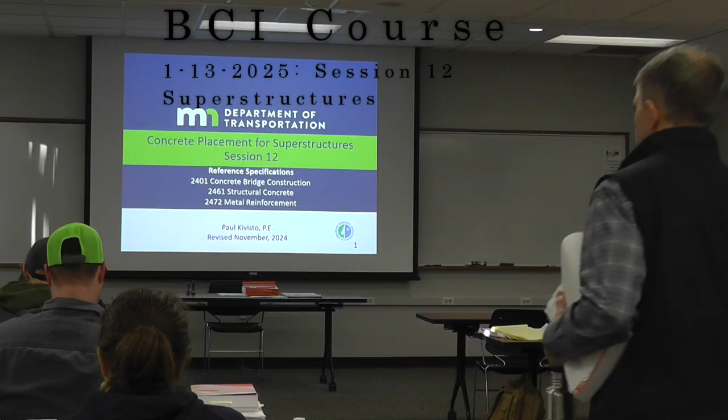Good morning, everybody. Everybody have a good weekend? Good. Chilly one to start this week.

So we don't quite have everybody here yet, but for week 2 we're going to switch to a different part of the bridges. We're going to start with the deck, or superstructure concrete placement - essentially this will concentrate on the deck, which is a big, huge part of what we do. So we'll start the week that way.

We're also going to hear about concrete issues from Jacob Dave from the concrete office.

Before I get into the rest of the week, the last I heard from the Tech Cert office is 10 of you had completed the test. A few more were working on it, so I don't have the latest update, but originally the average was 87%. There were 5 in the 90s, 4 in the 80s, and 1 in the 70s.

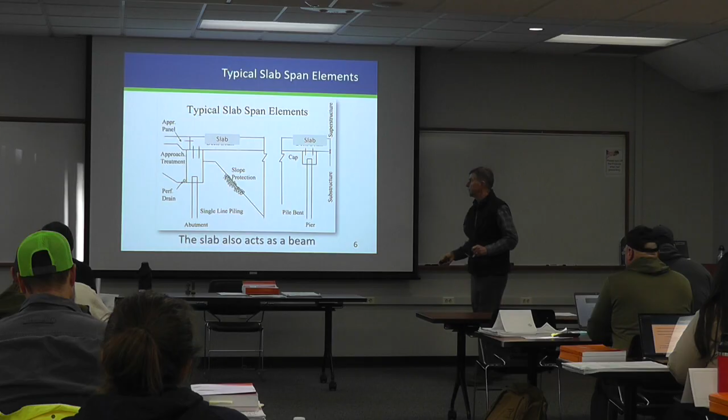So again, showing what the superstructure is. In our spec book, the very first part of 2401 - let's open our spec books, because we may wonder why we're going through something like this. On page 336 it talks about the term bridge slab for the structural portion of the deck, and the bridge slab definition continues on the very top of page 337. At the bottom of page 336, there's bridge deck slab, described as the complete structural slab and wearing course constructed monolithic. Then there's bridge structural slab, described as a structural unit upon which will be constructed a separately cast concrete wearing course.

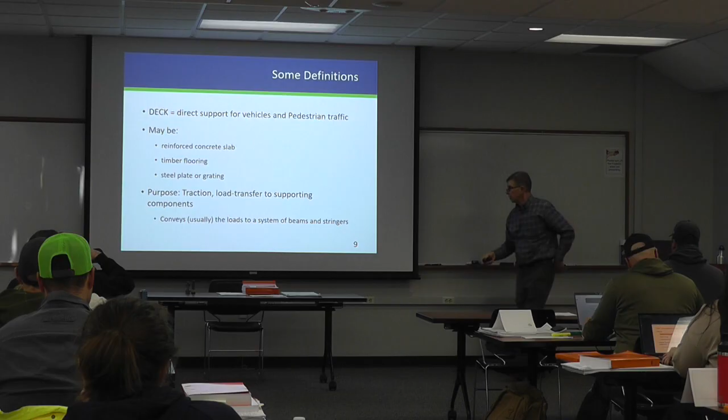The second purpose is to transfer load to the other supporting members. So we have a deck that is spanning 8 feet between girders, and you've got a wheel right in the middle. That load has to go 4 feet to this beam or 4 feet to this beam. So the deck has to be reinforced to be able to transfer that load, and it conveys that load to a system of beams and stringers.

Let's look at the definition. We opened our spec book already to 336, and it's written here. Bridge deck slab, the first one that's underlined: a complete structural slab and wearing course constructed monolithically.

Monolithic means it's all one piece. There's not a separate plane. So that's a bridge deck slab. A bridge structural slab then is a structural unit, and there will be a separately cast concrete wearing course.

So we see the difference. Monolithic, and typically if we just use our typical dimensions, a monolithic deck would be 9 inches thick. The structural unit is typically 7 inches, and then we'd have a 2-inch wearing course. It's not always 7 - depending on the beam spacing, it might be 7.5, might even be 8. But typically 7 inches is what we see.

And then just to further confuse everything, there's a definition for bridge slab which can be either a bridge deck slab or a bridge structural slab. Again, as we get specifically into the curing and into the finishing and the tolerances - is it going to be an 1/8 inch in 10, is it going to be a 1/4 inch in 10 - it's dependent on what our definitions are here.

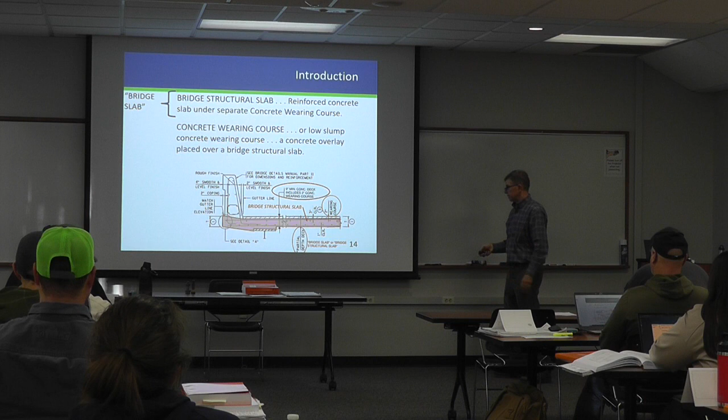The way we make a smooth grade on the bridge, even though the beams are cambered and they're going to deflect, is we use what's called stool heights. The stool heights are meant to be a variable distance depending on where you are on the beam, how much camber there is, and how much deflection is expected at that particular point.

So we'll be talking about that a bit more. It has a couple different terminologies. I use the term beam stool, also called a stool height, sometimes it's called a haunch. Again, it's that variable thickness. It is constructed out of concrete, it's cast the same time as the deck, and we'll see some pictures that will show how to do that.

The purpose is to provide uniform deck thickness conforming to the profile grade of the bridge, and also to make a smooth riding surface. We don't want a bunch of waves and whatnot as you're going across the bridge. We want everything to be smooth.

So we've talked about a couple of these. The camber is something that is either built into the beam, like a steel beam is fabricated in, or a pre-stressed beam, it comes in because of how the pre-tensioning is completed. The deflection is then you have a camber in a beam, and you load it with a concrete deck or live load, and that beam will sag a little bit. So that's called a deflection, the downward movement of the beam due to the loads applied.

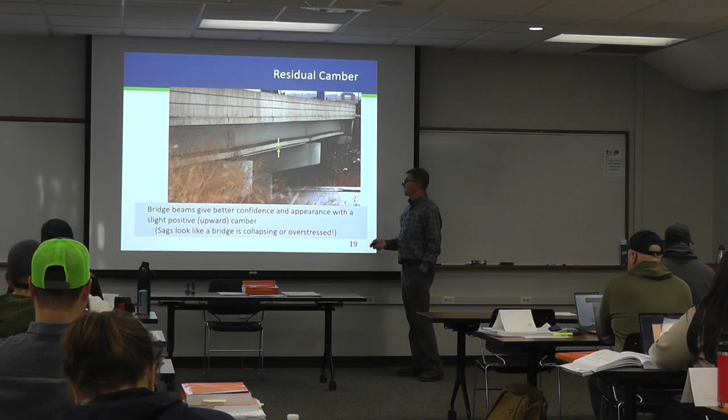Also then, going in and out of the page, we're going to have a profile grade. Is it going up at a 3% grade? Is it doing a curve right over the bridge? What is the roadway doing? All of those things have to work together.

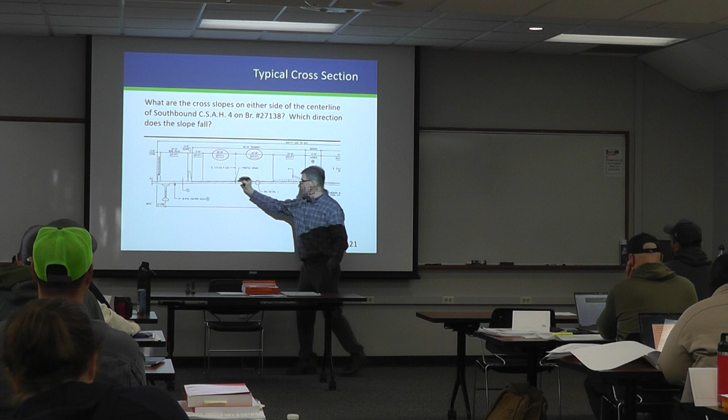Okay, so here's where we are, on 1A. Right here, 0.015, and you get to the center line and it changes to 0.02. Each bridge is going to be a little bit different, but each bridge is going to have similar things like that - there will be cross slopes, most likely more than one. Sometimes on a narrower bridge, maybe from the center line it's just 0.02 everything. But oftentimes the shoulder area gets a little steeper.

Anybody know why that would get just a little bit more grade? Get rid of the water faster - that's correct, and it also gives a little more area so that whatever water is coming in that gutter doesn't get into the roadway. So hydraulics engineers figure out how wide the shoulder has to be so they don't encroach into the roadway. They use whatever event, a 5-year flood or a 2-year rain event, I'm not sure what numbers they use, but try to keep it there.

So that's what happens there, everything is falling down to the left. So that matters when we are designing and calculating our stool heights.

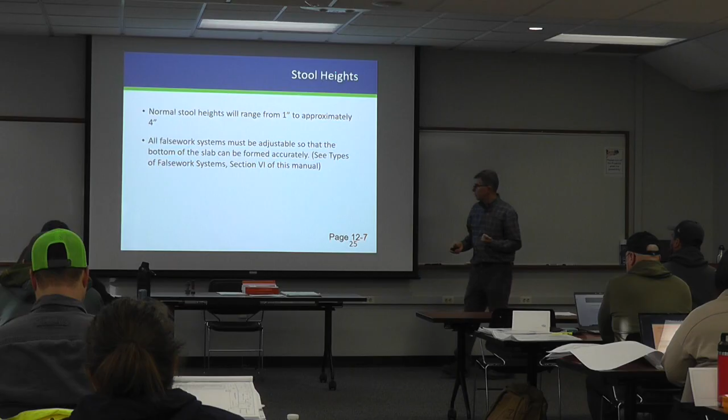Now the normal stool heights range from 1 inch to 4 inches, and all false work systems need to be adjustable. So I had that board hanger up here, we were talking about forming false work. That's how we make that variable system work. So that is something that we've done.

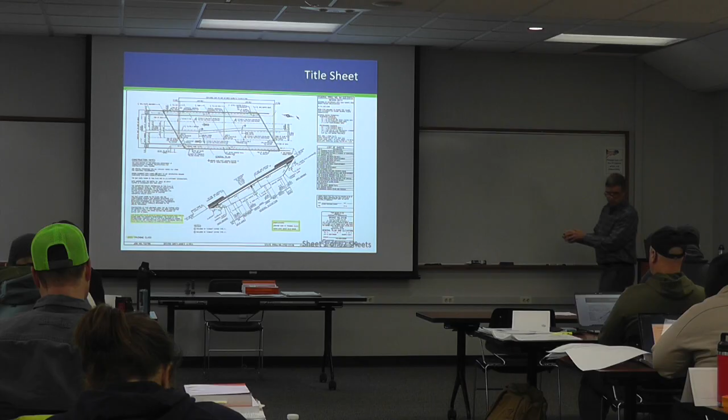So from our plan sheet, there's a lot of information. All of the vertical information, if we look at it, it's hard to tell here, but we've got all of our curve information. So there's a PVI, point of vertical intersection, which gives some stations, gives the grade to the left, grade to the right, and then BVC back over here, different things like that.

The general plan then would have the different lane locations, the location of the median, things like that are all shown here. And then, of course, our framing plan.

So now what we're going to want is to have elevations at each one of our beams from center line of bearing, 5 feet out on every single one. And so the person putting together the construction elevations or the beam elevations needs to put all of this stuff together in the program.

So you might ask, okay, we are going to want to know all these different things. Obviously we need to know at each girder, because we want to set the stool height for that. But we also are going to want to set our barrier, so maybe you can give us some elevations of the barrier. Maybe you can give us the edge of slab, center line and profile. All these things can be requested. What should the elevation be?

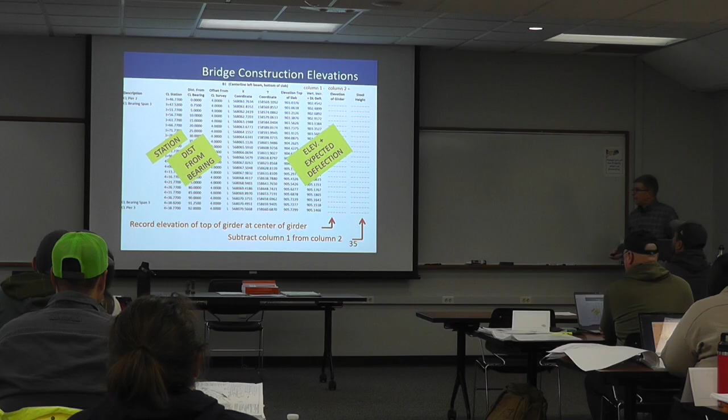Typically, the end of beam will go about 9 inches, but if you're really astute, there's actually an error in this sheet. I noticed, after I asked that question, that they got center line up here, and then center line bearing.

This column says distance from center line of bearing. This shows 0 at center line of pier. The center line of bearing is 0.75, but that should be 0. I've kept this in here just to point out that just because somebody, especially us engineers, gave you that, don't count that it's right.

So if you had that situation, would your center line of pier then be minus 0.75? Yeah, it would. So this would be minus 0.75, this would be 0, and then this station would change so that it's 5 feet from center line of bearing.

Because the reason we do that is that center line of bearing theoretically should be 0 inches of deflection. You have a girder sitting on a bearing that's not going to move. As you put a load out on the beam, no matter what the beam is doing, it's balanced on the bearing, it's not moving. So, very good observation that this number should be 0.

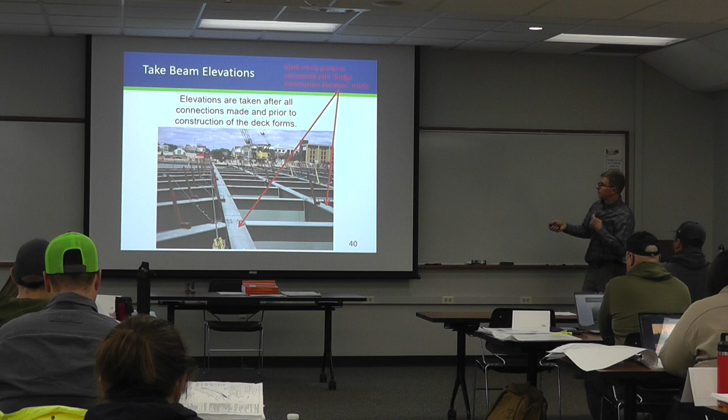Or if the steel's on the ground there for a while, you could do the same. So here's one where, I think this is one of those single point bridges again, but there's an awful lot of points that get marked out there, and we're going to have elevations at many different places. So mark those survey points to correspond with what the construction elevations have.

Splice plates, sometimes they'll fall within that 5 foot span. But it doesn't really matter, because all we're doing is taking an elevation to show where our bottom of deck forming is. So even if it happens to be right on a splice plate, maybe where he's surveying here, maybe this will end up being a 3-inch stool height, and maybe this one, because it's a 1.5 inch plate, maybe this would be a 1.5 inch stool height.

So we're just measuring wherever that 5 foot mark comes. We don't say, oh no, I'm on a splice plate, I better go back 3 feet. Well, we wouldn't have a construction elevation from this point. So you make it wherever the 5 foot mark comes.

So the typical plan note would be something like this: the contractor will take elevation to the top of beams after erection, allow for deflection to show.

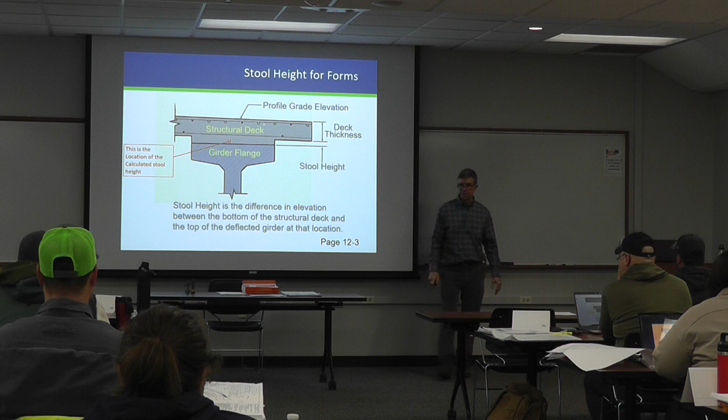Okay, so this is the one where deflection is always 0 at bearing. At center line of bearing, it should be 0. So right here at center line of bearing, but they are claiming it's 0.75 feet from center line of bearing. Okay, so let's just look at these numbers. Should be only the difference of the deck.

So if we take top of slab 903.0638 minus 902.4899, that would be the total deck thickness. And we do that math, it's 0.5739. Well, it's not 7 inches, which is 0.5833. This would be the perfect time to say, engineer, it looks like somebody messed up. We don't have the correct numbers here. So go back and say, let's get this right—we're trying to build a bridge like a Swiss watch, top of deck.

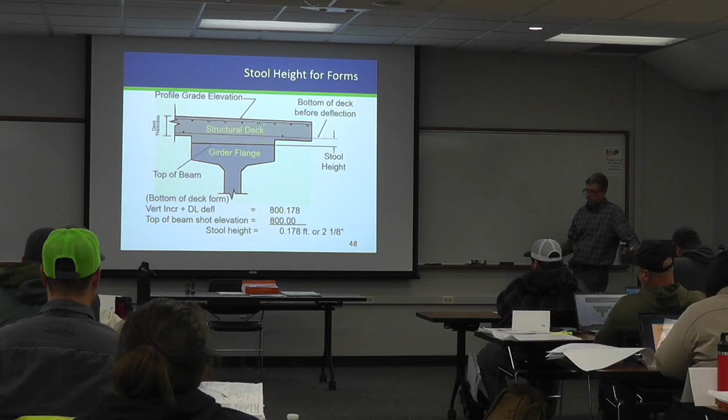So stool heights for the forms—this is again what we look at. It's the bottom deck form. We take the vertical increment plus dead load deflection minus the top of the beam elevation, and it gives a stool height. So if we just do the math here, 800.178 minus 800 is 0.178, so that's about 2 1/8 inches. 0.17 is right around the 2-inch mark.

So the special provisions do talk about taking elevations after erection and allowing for the slab. It also says to take elevations no more than 75 calendar days prior to slab placement.

The reason for that is these concrete beams, because of the pre-stressing in there, will continue to camber over time. So if you took elevations in the fall and waited until spring to cast, those beams will continue to grow in camber. Then spring comes, and your elevations aren't going to be right anymore because that camber may have increased by a quarter inch or three-eighths inch or some number.

So be aware of that in the special provisions, and be aware of all of the notes that we have.

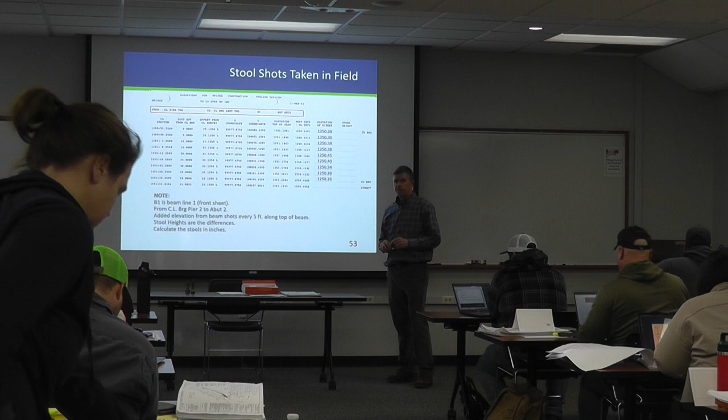And cookies in the back. Come on. We could use the refrigerator. Yeah. Figured something to do. Good question. But it's nice, it's just like metric. Engineer scale and metric. I want to chop that out. And then I come back on here.

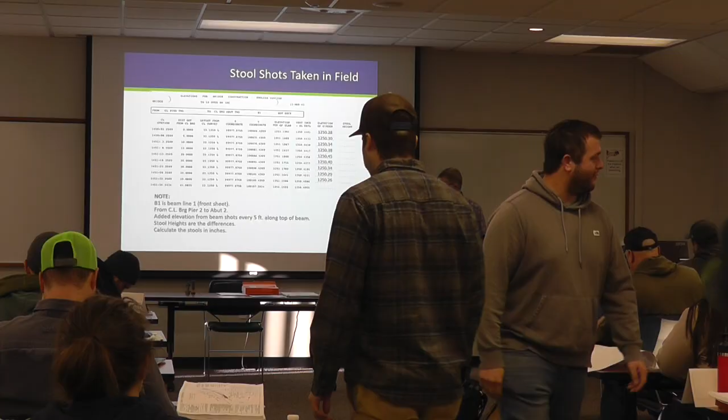Any questions about what we went over in the first 45 minutes? I don't know where they are.

Okay, so we're going to actually do a couple of little number crunchings here. So if we come out to the field and take our elevations at the girders, and we have these kinds of numbers, what do we have? So we'll have a little exercise here.

So the thing we always want to make sure is, are we in the right place? B1 is beam line 1, and so we look at that, and beam 1 is right up here. So anytime we're doing any of this, are we looking at the right thing? Are we in the right span? Is it centerline bearing pier 2 to abutment 2? So we just want to make sure everything is right.

So here's some numbers to crunch. From what we've said so far, we have a station, we have a vertical increment with dead load, and we have an elevation. What is our calculated stool height in feet for this number right here?

So the vertical increment plus dead load deflection is where the bottom of the slab wants to be. The elevation on top of girder is where the girder actually is. So we're figuring out the stool height.

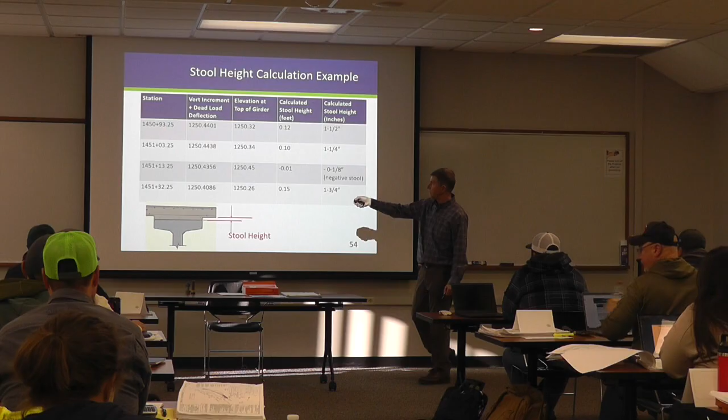Okay, so this would be where we're setting at these particular stations for this particular, whatever the beam is, we don't even have it on here. For those stations for that beam, I guess it's from the previous one, that's what we would have.

So otherwise you can commit these to memory and you can just think about how about 0.08 is about 1 inch, and that would be how we would do it. So again, we see for 1 inch, it's 0.08, 0.17 for 2 inches, and 0.25 for 3, and you can kind of commit these to memory, and again, that's not important, we just need to know how to do it.

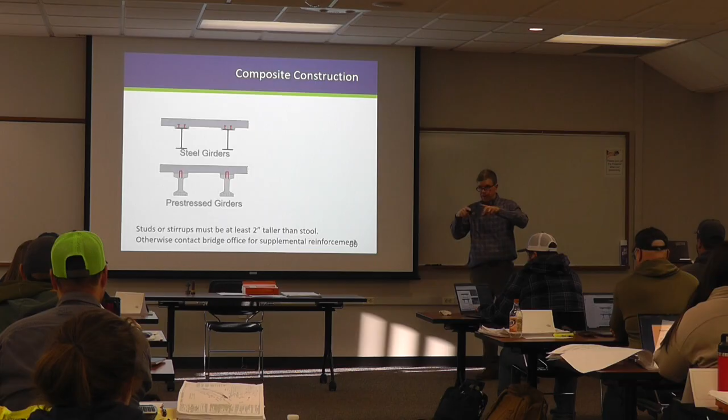The spec book requires that the composite action, that these hooks or shear studs are at least 2 inches taller than the stool. And typically we have a 1 inch bottom clearance, and then you'll have a bar. So you got to have from your bottom of the deck to bar is 1 inch. Plus you have 1 bar transverse, 1 bar running longitudinally. And to get 2 inches, you're actually up to at least the top of that bottom set of bars.

So here's what the composite action with the shear studs on steel looks like. Nick had shown a little bit about how we fabricate those and clean them off. There's an automated procedure to weld those on. Here's a picture of the concrete, with stirrups coming out looking like that.

Because of safety, we no longer put shear studs in place before the decking. When I started a long time ago, I remember walking beams with the shear studs already on there, and you had to walk sideways and be careful your pant legs didn't get caught up in them. This is a good move, it's a lot safer. You still have to be careful if there's no decking, but the shear studs now get put on after the fact. That's something that's in the specification.

It was a tripping hazard. You had to be careful walking, and so forth.

Once our forming is in place, if the stud height is less than the stool height plus 2 inches, longer studs need to be ordered. Nick had shown a picture of the little stubby studs they make—if the stud was too short, you could add a little 3-inch stud welded on top, which is a way to increase it instead of ordering full long studs.

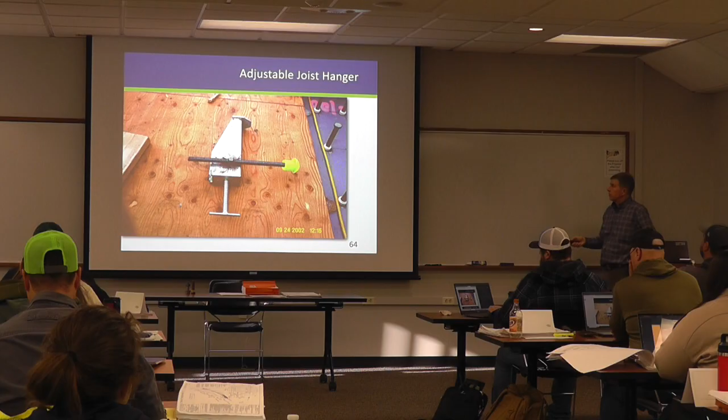We had looked at this situation before, when these kicked out. So what did we learn? We learned that you need something to keep those board hangers from kicking out, and that you need to put some kind of wedge or shim between the stringer and the edge of the girder to make sure there's no wiggle. That kicker is important to keep things stable—otherwise, this can happen.

These beams—our M series and MN series—are starting to get thinner flanges. The older shapes had like a 6-inch thick flange; now these are 3 5/16. It's a lot thinner a flange there.

There's a requirement now for future redecking that we put a bond breaker for a few inches on each edge of the beam for the full length. The reason we started specifying this is I was on a few redeck projects with pre-stressed beams, where there was enough composite action that all the deck concrete was composite constructed, making it really hard to remove the deck—so a lot of these beam edges would get destroyed.

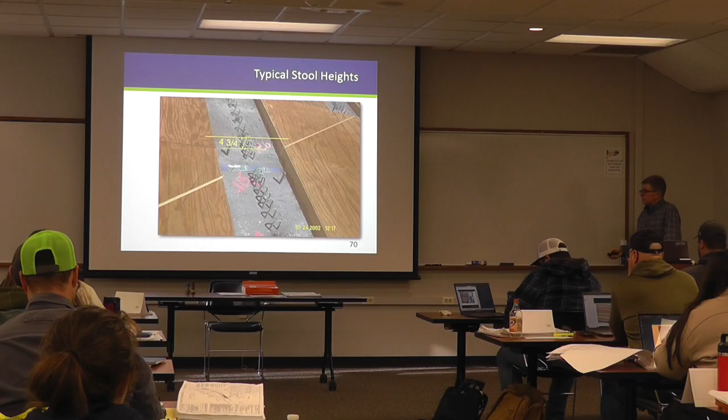What are the problems we could have? There's a couple issues. One, the structural deck thickness is less than required. Right here at the end of the girder, instead of a 7-inch or 9-inch, we'd only have say 5 or maybe 7, depending on the total deck thickness. So we'd see that that is a problem.

Now instead of being down here, the rebar would come up and over. Secondly, there's constructability problems with form removal. So we don't like negative stool heights.

So that's things we want to avoid. Okay, so what can we do? Linda said, well, somebody must have screwed up. Well, it's possible somebody screwed up, and part of this is, let's check what happened.

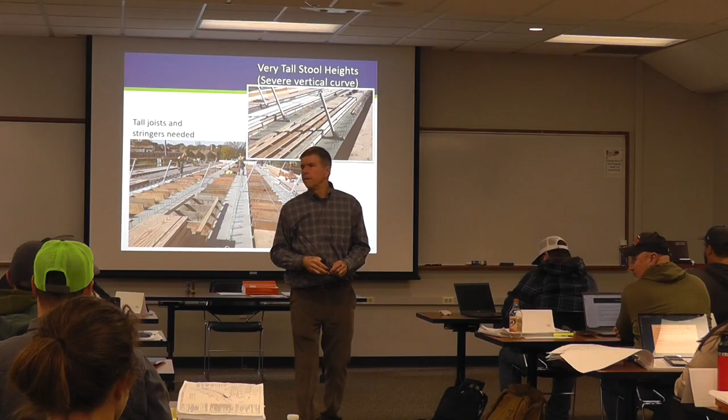That's something you'd probably want to make note of in the as-built data, just say that, yeah, we had to raise the grade, 3 inches or 1 inch, and oftentimes they would do it in the engineering scale, raising it a tenth. It's easier to work with, but otherwise no need for plan changes and things like that.

But very, very common. So if that's ever a situation on your bridges, don't think, oh no, this is the first time this ever happened in the history of MnDOT. It really happens quite a bit.

So an opposite thing is very tall stools. I think Nick mentioned this a little bit and showed the U-shaped hat bars. I'm going to show it again. What if we have, say, 8-inch stools, and these are only extending out 6 inches? Well, they're not even getting to the bottom of the deck, let alone to the bottom of the rebar.

So we would use what we call hat bars, kind of a U-shaped bar, bent in this shape, and they'd come out. Put a couple of longitudinal bars in there, and that would help produce composite action. It would help tie all of this reinforcement and all of the concrete stools together.

So that's what we have for that.

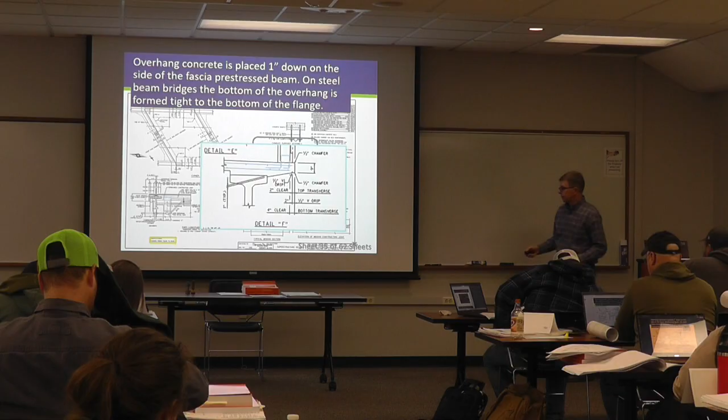Let's make it a little bit bigger - that little 1 inch typical. So we can see there's a lot of lines here, but essentially these are just dimension lines. This top line is pointing to the top of the girder, the bottom line is pointing to where that goes down. So I see a lot of these little forming details. Decks formed 1 inch down, and a lot of times that just gives us a little cleaner lines.

Here's preparing to install the overhang brackets. I think I mentioned in the forms and false work, this is one of the things where many times I've gone out to bridges and looked at how is that ever going to come back down, but they do. So the information from the form manufacturers is pretty good.

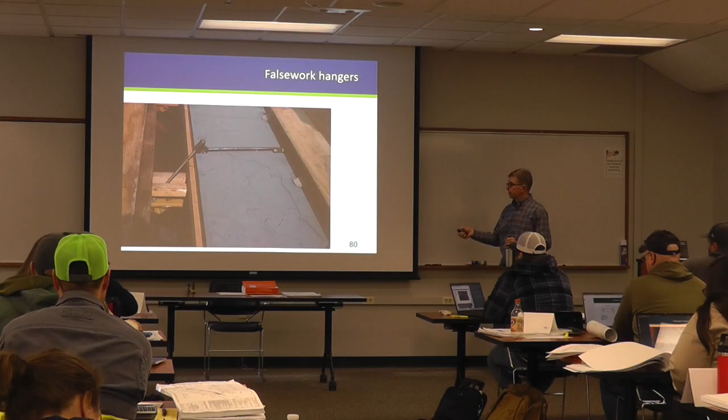False work hangers - this is an older system. We don't see this much anymore, but always be looking at what the contractor is supplying, whether there are safe working loads, and make sure our calculations match. What if the contractor wants to use the older style that you weld right here? Is it allowable? Galvanized? Welding to the top flange of steel is not something we want to do.

So we stay away from welding. What can happen is it can make a fracture, especially a transverse weld like that, and really any weld. It can start to initiate a crack, and pretty soon you could have a fracture of that girder. So don't allow them to weld on the top.

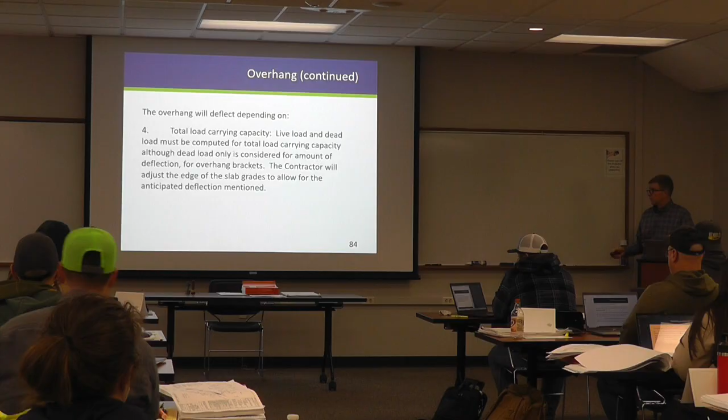We always want to know what's the total load carrying capacity. Live load and dead load must be computed. The live load oftentimes is the weight of the workers, of the screed rails, of the screed itself, whatever's going on like that. And this is essentially just saying if the overhang deflects a 1/4 inch when dead load is applied, it's actually raised a 1/4 inch. The manufacturer has to supply that information.

We want to have a secure and stable connection. If you have a stringer with a little gap and you don't fill that, as load gets applied, it can tend to shift a little bit. So you want to always make sure we have a little wedge in there to stabilize everything.

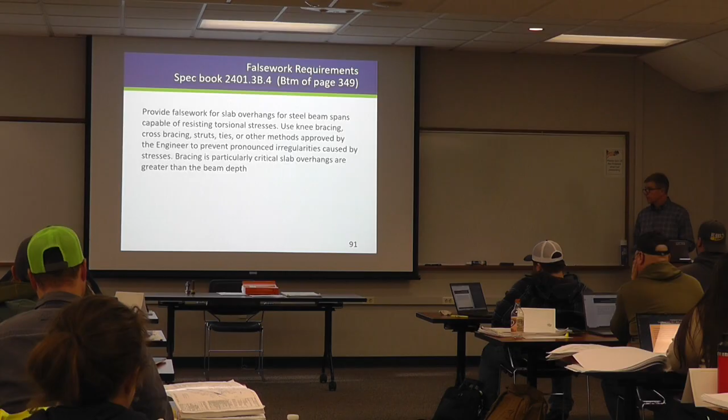We talked about falsework requirements quite a bit last week, and the requirement again is provide falsework for the overhangs, use knee bracing, cross bracing, struts, ties, whatever you need to prevent any irregularities, and brace and so forth. It's critical that we make sure everything is done.

Again, kind of a review, but why do we check falsework? Why are we learning about falsework? It's so that you will be able to know and verify - is the spacing of the members what the falsework plan shows? The design plans are not going to have that. What do the falsework plans show? What's the condition of those members? Is the material what we need? So we did study that.

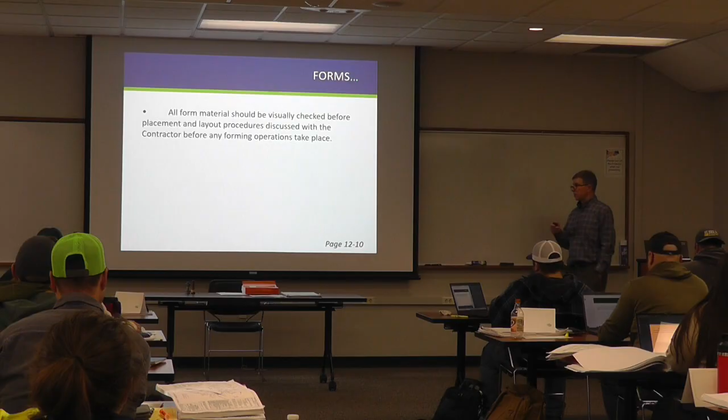Many times it can be adjustable formwork, like we studied in the forms and falsework section, so we don't need to go into much detail there. In the forms, everything has to be visually checked. Remember that the contractor's falsework engineer has to come out if it's falsework and review that this is what is required. And if the contractor makes changes, they're certainly fine to make changes, but it needs to be approved. Make sure if there's anything that's bent, cracked, holes, knots, whatever, that somebody is aware of that.

Okay, now let's get into a little bit of some of the specs. So 2401 3B7 - let's open our spec book to that. It's on page 351 of the spec. We're going to talk about some of the particulars of deck construction.

B7, toward the bottom of the page, says before placing reinforcement, treat the contact faces of forms with form coating material according to 3902. Why would we do that before placing rebar? The rebar would cover part of the form, kind of, but not exactly. What else? You don't want release oil on your rebar, because you want the concrete to grab the rebar. If you put oil on the rebar, the concrete won't be able to grab onto it to make it composite. So that's a requirement that all forms shall have form oil applied before rebar placement - that's right in the spec book.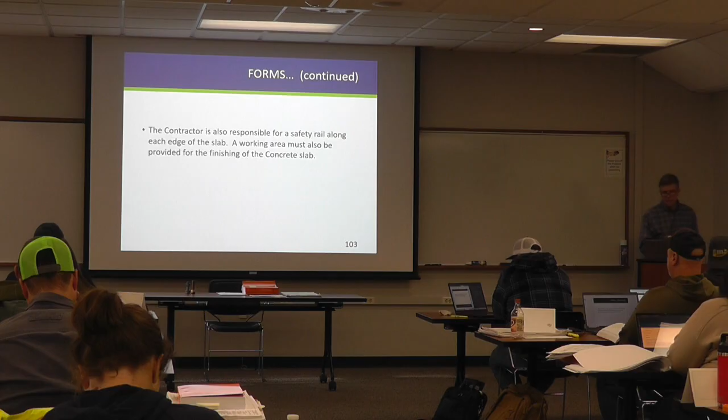Reinforcement bars—we discussed that in section 7, Mark did. And it's important that we have the proper clearances. Obviously the proper size, the proper spacing, and the proper clearances. Just make sure everything is correct.

What's the clearance on our bridge from the bottom of the deck to the bottom mat of rebar on 27-138? Figure out what plan sheet we're going to find it on.

Just in general, where are we going to find the deck sheets and the deck rebar? Superstructure details, yeah. So starting, is that going to be more toward what part of the plan? Starts on 35, very good. So somewhere there we're going to see some numbers. So who can tell me where we can find the clearance, bottom of deck to bottom mat of rebar?

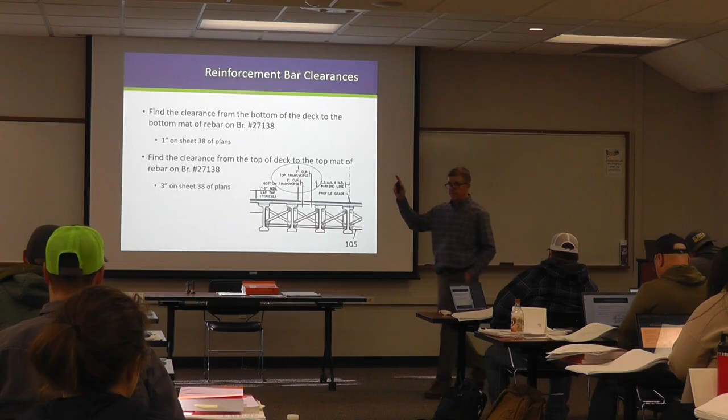This is very common. 1 inch to the bottom is very common, 3 inches at the top is very common. In fact, I would say if it's something different, it would be a 1% of bridge type thing or something. I mean, it's almost 100%.

Okay, another one. Find the clearance from the edge of deck to the top transverse deck rebar on our bridge. This is going to be on a different page, I'll tell you that. Same general location.

What was the question again? Edge of deck to the top transverse deck rebar. So for terminology, transverse deck rebar, which way is it going in the deck? Kind of with the stationing, or perpendicular? Perpendicular? Yeah, so it's the bars that are perpendicular.

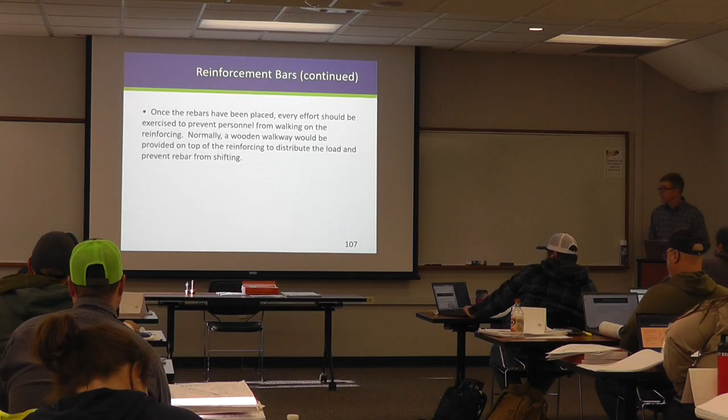Once the rebar is placed, we want to exercise caution that we don't keep the bars from moving. Normally a wooden walkway would be provided. And here's just a reminder, no foot traffic should be placed once rebars are placed. Why? Because it would disrupt the bond of that rebar. And where bars project well above the placed concrete, we also want to brace them to make sure they stay in place during the concrete placement and the finishing.

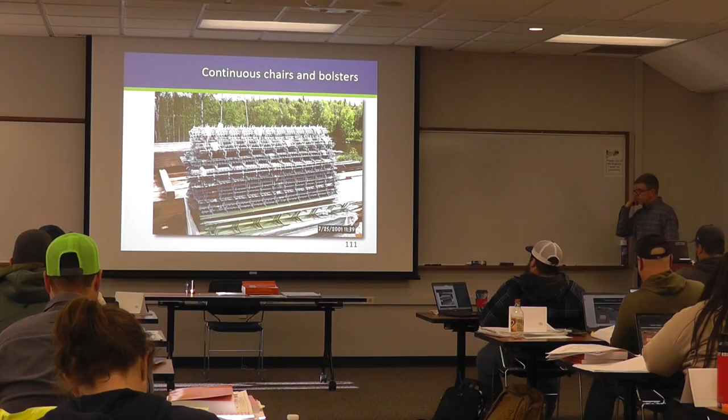So this is what our continuous chairs and bolsters look like. Something like this is for the higher chairs. We've got a couple examples in the back there of some high chairs.

But I want us to do a little exercise here for what is going to be the height of our high chairs for our bridge. So we have two spans, span 1 and span 2. We're going to look at sheets 35, 36, and 37.

I guess I'll ask it this way: what are the longitudinal size bars? They're going to be the same in both spans. And what are the transverse bar sizes in span 1 versus span 2? So first off, who can tell me for the longitudinal bars, what size are they going to be?

Let's look first at the top reinforcement on sheet 36 - longitudinal bars running along the length of the bridge. So let's look longitudinal - the ones that are running from abutment to abutment, the bars running this way.

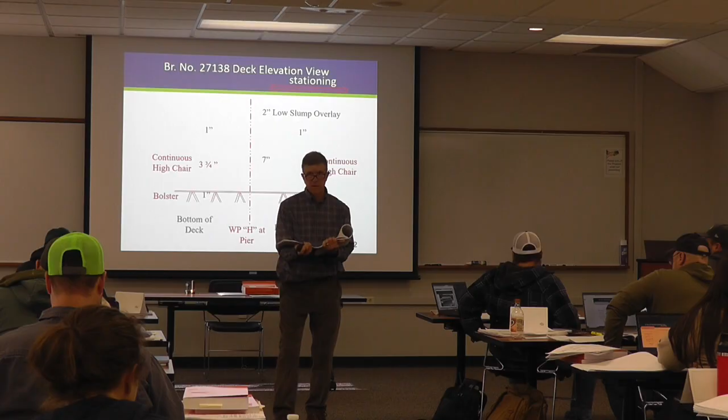Okay, is everybody following? So we're looking at the bars running the length of the page. These bars are kind of in the middle - I'm on page 36, it's an S401E, and there's a bunch of arrows running to them. Then over here it's an S402 on the end. So what size is that bar? Number 4, meaning how big a diameter? Half inch, 4/8 or a half inch.

Did everybody see that? Okay, so now how about the transverse? So the transverse on the same top reinforcement, page 36 - what's the size of the transverse bars? Okay, heard 5 for span 1, 4 for span 2. Everybody seeing that? Okay, so here is the designation, and that's showing all of these bars going this way.

Oh okay, see that? So these dimension lines here are saying that we start dimensioning a bar up here. And this is a 4, and over here, what number is that? That's a 5.

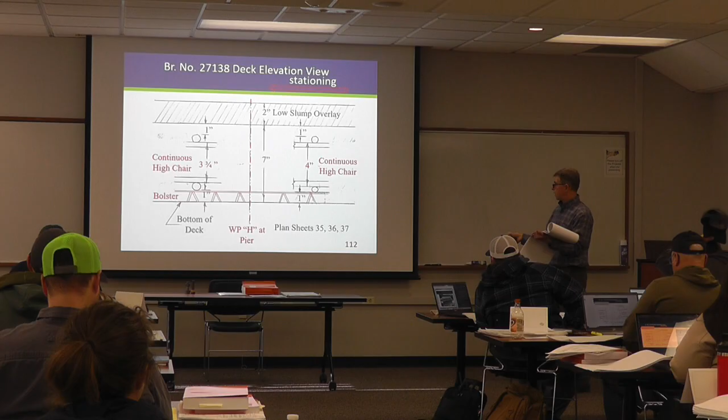Okay, are we able to see what we got there? So the transverse are the ones going perpendicular. Again, span 1 has number 5, a 5/8 bar, and span 2 has number 4s, or a 1/2 inch bar. Okay, so everybody get that? That's a key part of reading what we have on our plans. So what are we trying to do? That means in our plan we have different size bars - it's 5/8 inch in span 1, and this bar is a 1/2 inch in span 2, and then the longitudinal bars are going to be 1/2 inch in each case.

So I think we have some math that happens here - what size are transverse in span 1 and what are they in span 2? And so we just put in some numbers here.

So the continuous chairs that they bring out actually have to be different in span 1 to span 2, because the chair will sit on top of, depending how they do it, either a bar or the bottom bolster. Typically it's going to be on top of this bar. This little arrow to this little arrow is showing that's 3 3/4 inches.

Because we will go on top of the transverse bar and then space the longitudinals in there, and then we'll set the top transverse bar on top of the high chair. So what this is telling us is that if they come out there with just a 4-inch high chair in both, they're not going to have the correct overall 3-inch clearance to the top of the deck. If they went with a 4-inch chair, that would push this up. So just be aware of that, do the math, make sure the contractor has the correct elevation and size of things. So that's a little complicated.

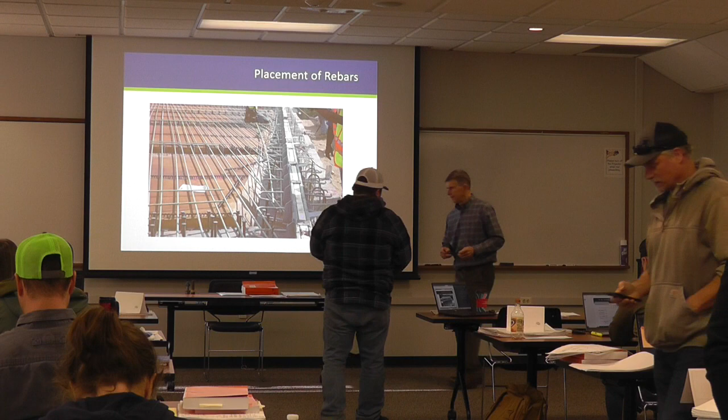Okay, let's get rolling again. So any questions on what we were doing for those few exercises?

Best thing you can do is go through and highlight the plan, find all the bars. Just find out what the bars are, what the laps are, and all that kind of stuff will help us when we're out in the field trying to inspect. Yeah, there's just some key dimensions always and key bars.

Okay, who sees anything wrong with this picture? Can we tell what's going on? There's a bottom slab bolster right here, a chair right here, a bolster over here, a beam over here. I think your high chairs are going the wrong way. High chairs are going the correct way, but yeah, they're in between those slab bolsters. These should be stacked, so the high chairs should be right over where the lower slab bolsters are. So you see that's in the wrong direction.

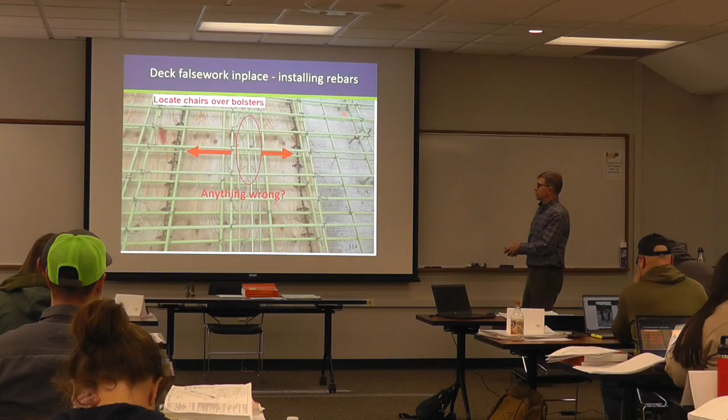So here, this is an old one — almost took it out, but among the things they're talking about is some of this plywood isn't matching, check what the spacing is on some of those bars, walkways, studs not placed in positions correctly. But a lot of times we want to make sure our bolsters and our chairs are in the correct location.

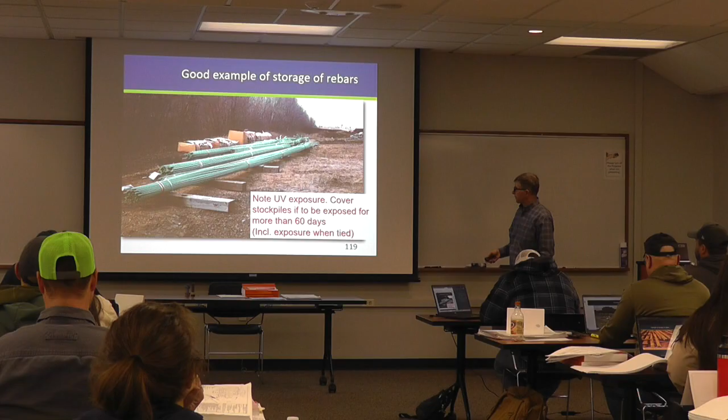Also on page 550 - one of the first jobs when I was a Metro Region engineer, I went out to a site and an iron worker said, 'Hey, we don't have to tie 100% of these top bars, right?' I said, wait a minute, I think I remember the spec. And indeed there is. On page 550, bottom paragraph, it says to tie the top mat of epoxy coated rebar at every transverse bar intersection along each continuous row of longitudinal bars.

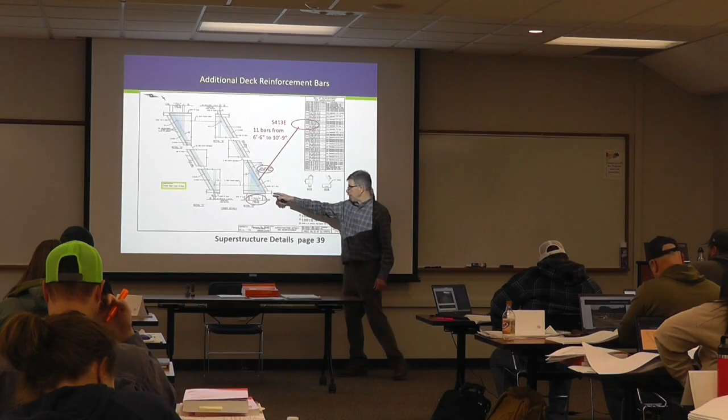What is the length difference of those series bars - what's the shortest and what's the longest? S413 - they're 6'6" for the shortest, and the longest is 10'9". You see that in the chart, in the bill of reinforcement. That's 413, 2 series of 11, meaning there's one on one corner and one on another corner. The shortest bars are 6'6", the longest is 10'9", and you put them in there with the 5.5 inch spacing, then fan them kind of as shown.

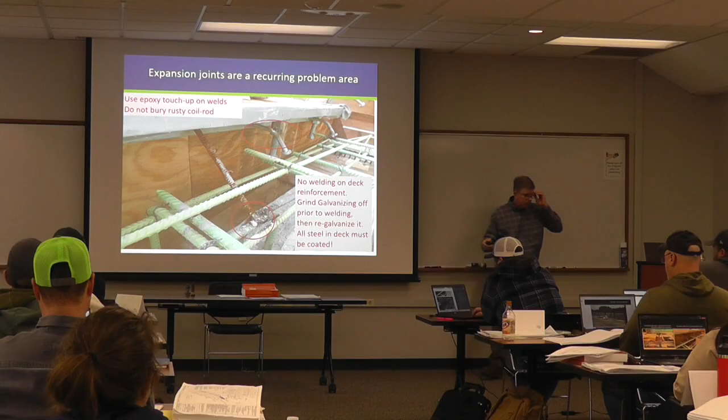Here's some pictures of expansion joints. Use epoxy touch-up on the welds, don't bury rusted coil rods like shown here. We don't weld deck reinforcement, grind off for galvanizing, and then re-galvanize it. All steel on the deck must be coated. Sometimes there's no workaround, so an occasional tack weld has been allowed, but I'd rather have a solid expansion joint than say the spec prohibits welding rebar and end up with a sloppy job on the joint. Be aware, sometimes you do need to do something, but it really has to be minimized.

Also, if we're going to have a secondary pour, we want to protect the epoxy, the concrete, and the rebar from concrete splash. This is more so on rail bars, not necessarily here. This is just an end diaphragm, and that would typically all get poured with the deck, so it's not quite a big deal. But a rail rebar is more of an issue.

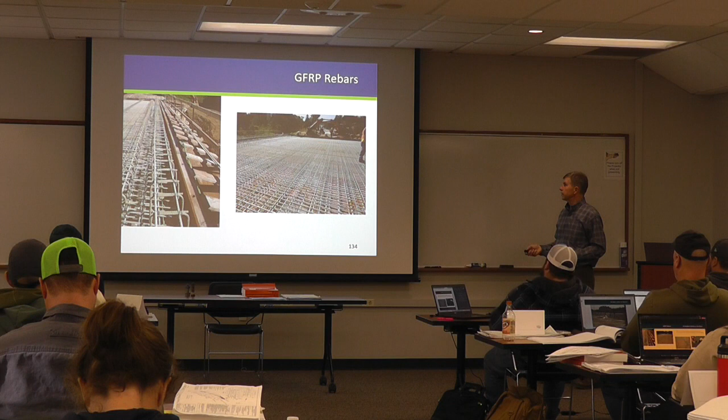Okay, so we'll transition now to how do we finish these decks? The contractor has to understand each span has to be loaded uniformly, especially if you're on a skew. We'll talk a little bit about some of that kind of stuff.

We want to have elevations correct for expansion joints, for bulkheads, for copings. As inspector, the numbers will tell us one thing, but our naked eye will tell us another, that we can sight down the rail, and if we see a little dip, well, something's wrong, that shouldn't be like that. So oftentimes that's the final check, is just look, does it make sense? Does our naked eye check seem right?

Okay, what do our specs say? Page 367 of the spec book talks about our power supported screeds and things. So let's turn to 367 and let's see what it says. Okay, so we're C-4, which starts actually on page 366.

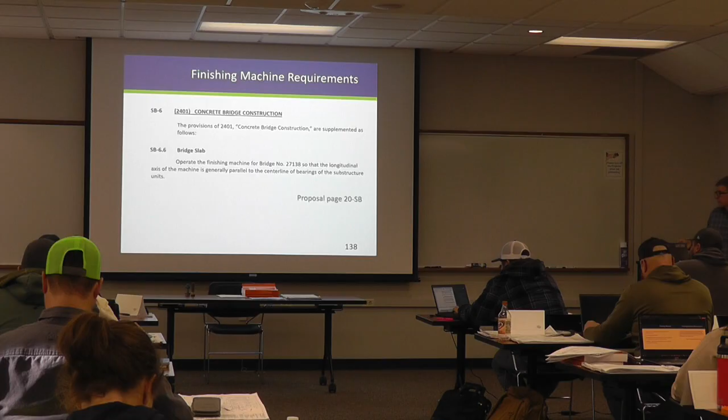Okay, page 367, we also have some requirements in our special provisions. And again, we have the wrong special provisions that we handed out in the class, the right ones are now on the website. But for 2401, it says this: operate the finishing machine for our bridge so that the longitudinal axis is generally parallel to center line of bearings.

We also have requirements on page 364 that talk about, if we have at least 2 spans, the concrete has to remain plastic for at least a half span length back, and provide admixtures as needed to retard the concrete setting time. So what does that mean in the real world, in the practical world? Let's look at a little diagram here.

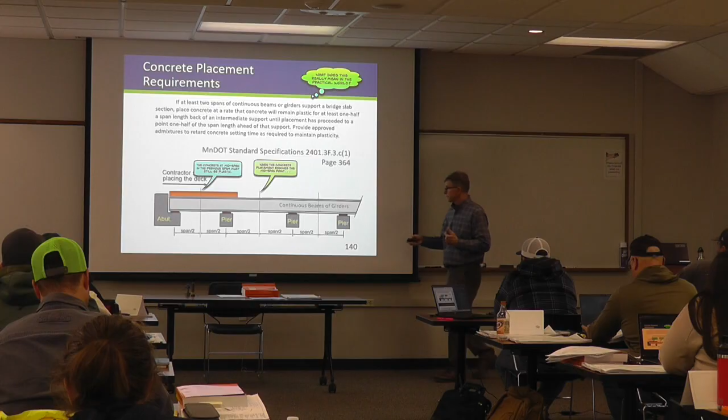There's also requirements, page 363, of having a trial run with the strike-off machine. This is on F3C-1, very bottom of 363. It talks about checking the depth and a shim to the rebar. Essentially what we're doing is verifying that the slab thickness is correct and that we have clearance to our rebar.

You want to check that your roadway crowns are in the right location, and any strike-off is done correctly. If you're off the bridge, you don't have any deflection, you're right on grade, so whatever grade rails or screed rails you have, you don't have to account for deflection. But when you're on the bridge, you need to account for deflection.

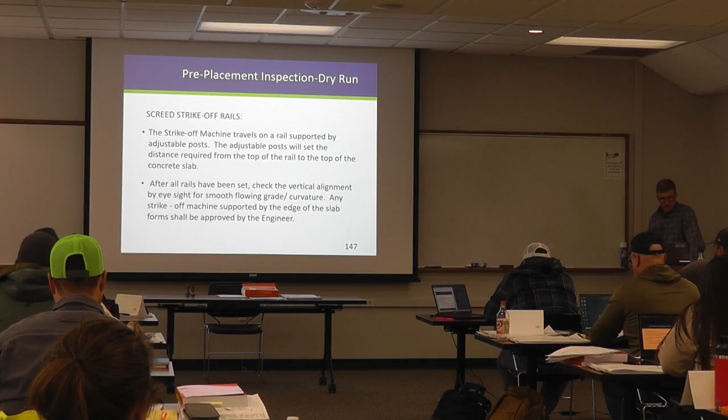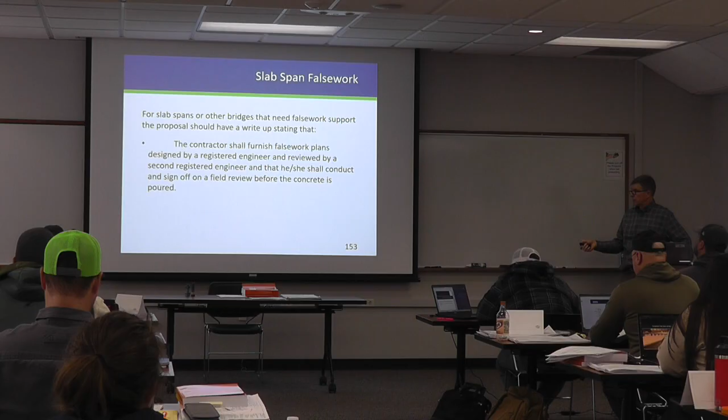Slab span, there would be some additional language that they need to furnish false work plans. So again, in the forms and false work section, we looked at that, designed by a registered engineer, reviewed by a second, and then he or she shall conduct and sign off a field review before the concrete is placed. So that's all part of forms and false work and the things that we do.

Sometimes we will have a requirement to cast in a certain location first. And this is if the spans get long enough that they can't achieve and keep concrete plastic at half a span back, we would require that they do a deck placement. So all this is showing is the first one is from the abutment out to this location. So that's pour number one. You're trying to get some of the positive moment deflections out.

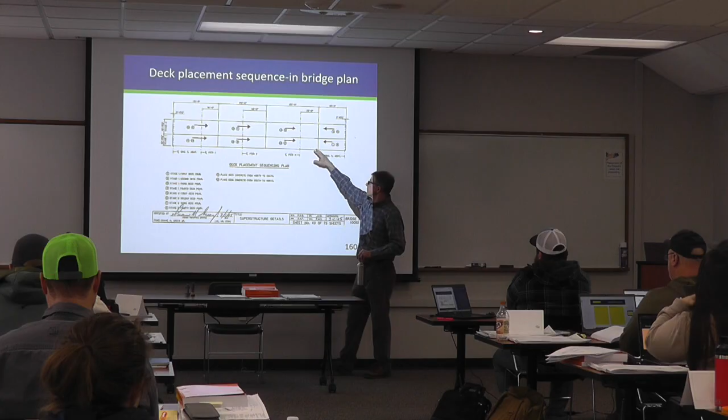And then you're going to come, pour 2 is coming this direction, and you're going to come back. That is coming over a negative moment region. So positive moment is typically mid-span, negative moment is over the piers. We're just trying to minimize the amount of tensile forces that might happen during a deck pour. But if you have longer span, if you're on a steel bridge with longer span, this might be in the plans. So just be aware of what it means.

So the sequence oftentimes would be for spans that are greater than 200 feet: typically we place a positive moment first. Sometimes it combines a positive with a negative moment. If we're doing simple spans, it'd be support to support. But this is kind of the rule of thumb. And we would maintain a pour rate of 0.6 spans per hour. So essentially in a little bit less than 2 hours, you got to be able to do each span. So you got a 200-foot span, that's a long ways to go.

And then you'd wait 72 hours. This last part, do the center part after 72 hours. So you can wait for concrete to cure before you do it again.

So the special provisions might have things like maintain 80 cubic yards per hour. That's a little bit more, you can track that better than the 0.6 spans per hour, but whatever. Just read the special provisions, know what it is. And especially on slab spans, where they're thicker, even though the spans are less in length, it's a lot of concrete that you need to keep going. So they want to maintain 80 yards.

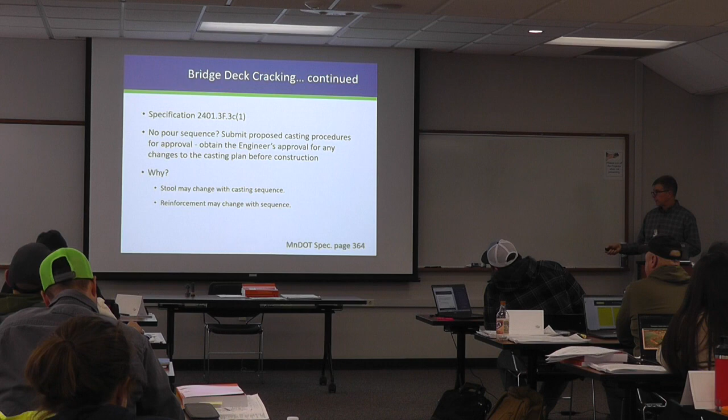For deck cracking, to minimize it, we really want to see what the contractor has. So sometimes we would say submit your casting procedure for approval. And if they do something different than what the plans are intending, the stool heights might change, especially, so we're taking a lot of deflection out of one, but it's restricting the deflection in another point. So it's even possible reinforcement may change. I guess I haven't seen that in my days, but it's possible if you really change something up that you could have some changes there.

So here's some more spec stuff that we have. There's a whole bunch of specs there, page 3, starting in 363 all the way through 376 of what the forming is. But we'll bring to your attention this one.

Provide a placement and curing plan at least 14 days before the slab placement to the engineer for approval. And these are all the things that they need to consider in that placement plan.

Now, what is your delivery date, rates? When are we going to start and finish? Are we starting at night, finishing in the day? Are we starting at 6 p.m. and going through the night? And whatever's going to go on.

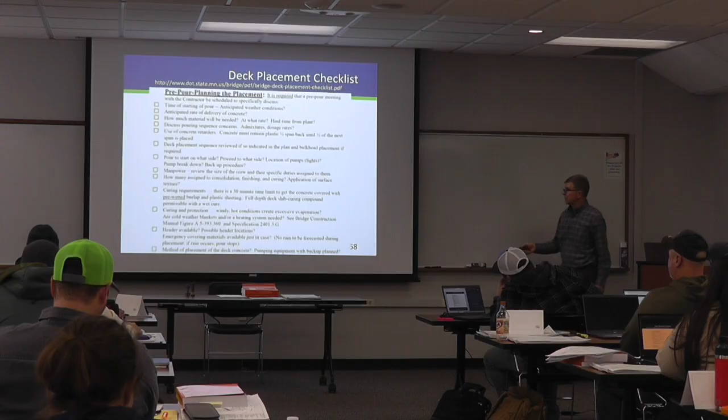There is a deck placement checklist on the Bridge Office website. This is a handy tool that, as you're getting ready to cast a deck, you can run through. The next one blows it up a little bit more - when are we starting, delivery rates, manpower, so on and so forth. This doesn't have to be filled out, but it's a good tool to help remind you of the things you should do.

So, different things here - I think it's 4 pages or something. So a lot of things that can help remind of what is needed.

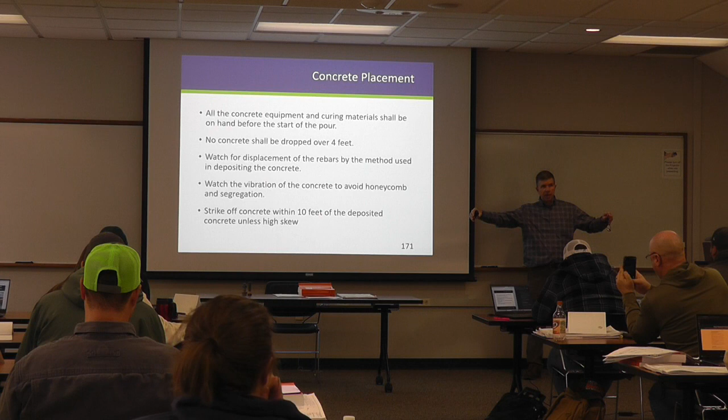There's also a requirement that you need to strike off the concrete within 10 feet of deposited concrete, unless it's a high skew. All that means is don't go out to half the span placing concrete and then finally get around to striking it off, because by then it'll start to harden up and you could have drying shrinkage issues. So pretty self-explanatory on that one.

Concrete placement over traffic - this is something that's changed in the past couple of years. Be aware of your special provision. In the past, we used to routinely place deck concrete over traffic, but that has changed. So review your specs. Now, a lot of times you require them to shut the traffic down, or go up and over a ramp if that's available, a little detour, whatever. So review your special provisions. If there's an absolute need, I think there's things that the resident engineer or the project engineer could get into the spec, but anyway, just be aware of what might happen.

So there's 2 different types of deck pours. We've so far shown some pictures of the Bidwell finishing machine. A structural deck pour with a separate wearing course means that there's 2 pours. We can use a Bidwell finishing machine, or we can use what's called a Morrison screed, or an air screed. And we'll show some pictures on that.

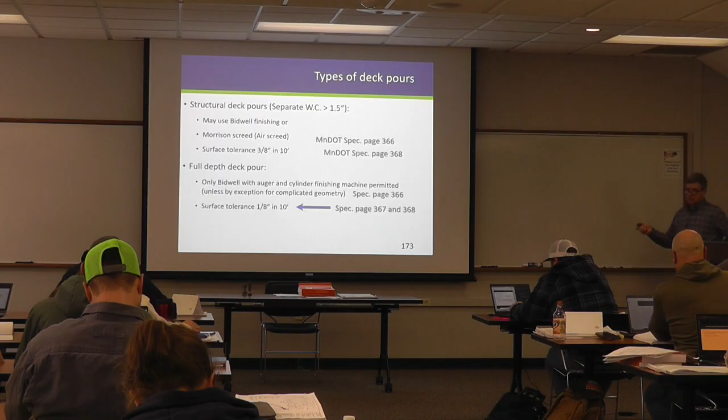And then the surface tolerance shows up in a couple of different places, but back to that page 368 where we looked before, item 4 shows it does not vary by greater than 1/8 inch, checked with a 10-foot straight edge, for bridge deck slabs. So we see the difference there - the surface tolerance, if you are running traffic on that surface, a full depth deck pour, we need to be a little tighter tolerance.

So if we were going to do this deck without a separate wearing course, what would be some of the issues? This is our bridge deck without a separate wearing course - what are a couple of the challenges that we might face?

If we needed to do a full depth deck with a median width, what's the median doing? It's varying all over, one side or the other, so to set up a finishing machine you'd have to contend with that. You'd have bars projecting up out of the deck, so you'd have to somehow hop up and over, or maybe set up one machine on this side and another on this side. So that's not too conducive to doing a full depth deck pour. Now if that median was straight, maybe that'd be a little easier - then maybe we could do half of it with one finishing machine, another one with the other. So that's something we would see.

Also, we have the trail areas - how are those going to be finished? We have bars extending out, so there are some things we need to think about as to the type of deck pour and the type of geometry we have.

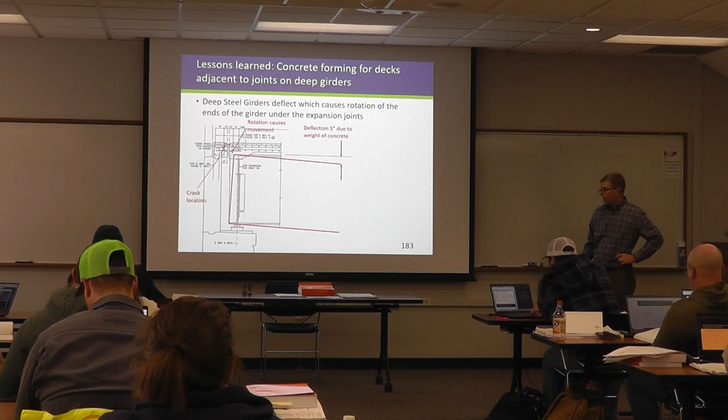So this is what happens. Deflection was 5 inches due to the weight of concrete. They started at the abutment and went to the right. By the time you get out to mid-span, most of that deflection has already come out, meaning that girder end is moving. So what's happening here affects how that end is formed. I'll have a couple of diagrams that will show that, but what they noticed out there is cracking right along in the end block.

Using this diagram in this picture, depending how you form this, the end of the girder is moving to the right due to deflection happening out in the mid-span.

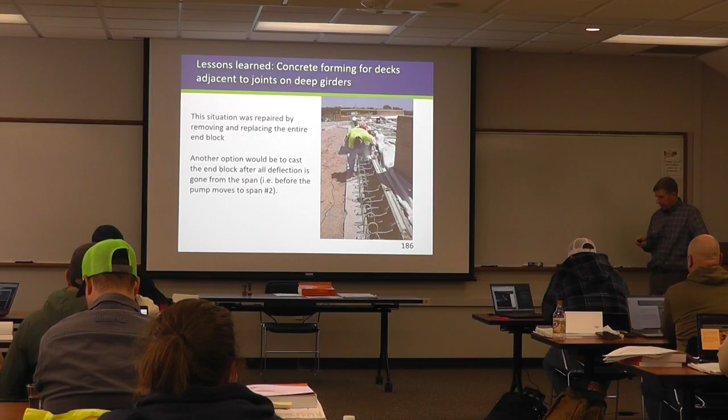In this case, that finishing machine obviously can only come to these bars. It doesn't lift up and over and then do this. So this is all separate, done by hand methods.

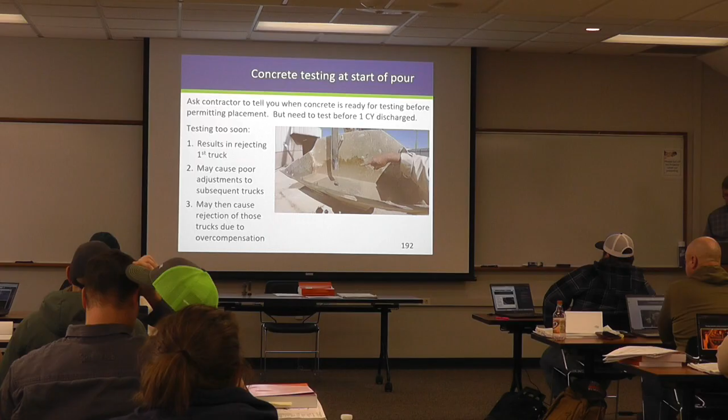For surface finishing of the deck, page 367 of the spec book has some of these things: don't overfinish, no use of steel trowels, float only enough to close the void. So any of you who have been around concrete, whether it's sidewalks or your own construction, you know if you finish it too much, it brings bleed water up, and then you start finishing the bleed water in, and it can be a problem. It does require a 10-foot highway straight edge, sometimes called a float, but it's required behind, so we just want to get all those imperfections out, get it as smooth as it can, and also make sure our crown is in the right location.

And then there's a requirement to texture the surface with a carpet drag, or they could use a broom type finish if needed. That's on page 368, final finish texture. This part here at the bottom says: texture the surface by use of carpet drag, heavy brooming, and/or tining. Why are they still tining bridge decks? That's for skid resistance. These are really loud - it makes them loud.

We did some noise studies - if it's true perpendicular to the roadway, it's louder, but if you put it at a diagonal, the right tire is going over at a different time than the left tire, and that makes it better. Like a 10-degree skew or something? Yeah, exactly, and so that makes it better.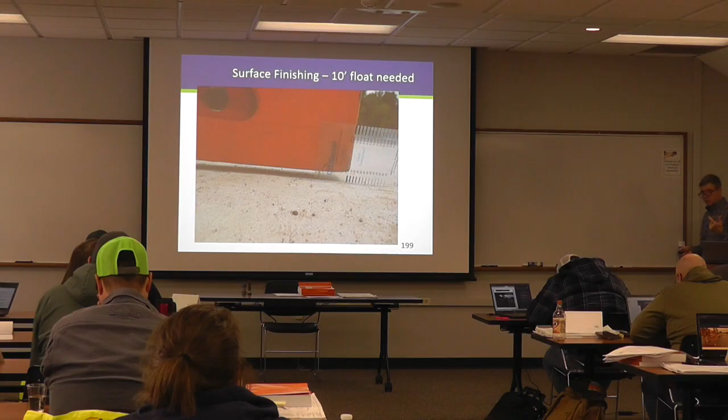The surface also has a texture. Even though we're going to come along later and diamond grind it, or tine it, we still want to have some texture put in. So the tining, there are some requirements for it.

It shall not extend into the area within 1 foot of the curbs, and this is for drainage. We can imagine drainage goes better on a smoother surface. Also, if there are tines in that gutter line, there would be more salts and chlorides and stuff that would get caught up in those tines, and it could lead to earlier deterioration. Thus the requirement to leave 12 inches or 1 foot when we are tining.

If we are planing, we can only get within about 20 inches, so that's a little bit different. The concrete planing goes within 20 inches, strictly because of equipment limitations. Watch your special provisions for that. Planing is sometimes called diamond texture grinding. We'll see some pictures here that show about that.

Here's some straight edge language, looking for what is the surface tolerance. Do we have any big holidays and so forth? If we do a straight edge here, there's a rolling straight edge that can be used on longer bridges. Otherwise, the bridge construction manual suggests a couple of passes per lane, and also check the gutter line. You can look at that information, but it is a requirement to check with the 10-foot straight edge the kind of surface that we have.

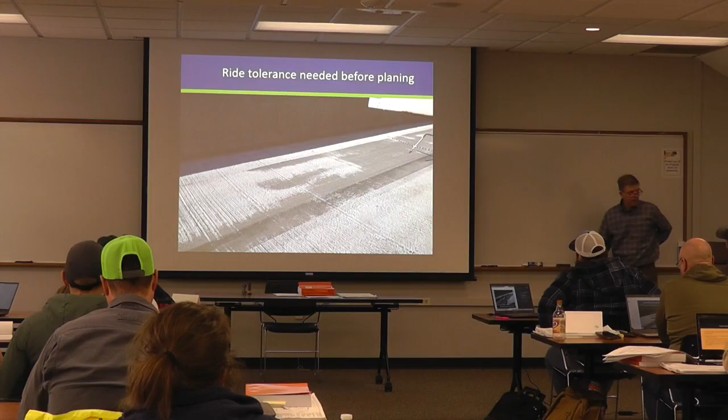So here's something that looks for how accurately and how smooth that was cast. The ride tolerance needs to be met before planing. We don't want to use planing as a way to cover up all the errors that we have. But we also require the surface texture that even after planing, if something in an area was low, we'd still have some kind of texture on there. That's the reason for doing the carpet drag or grooming beforehand.

You also need to watch out on your joints. Here we're planing over the joints, and in some cases the surface finish before planing is so bad, they end up grinding into the joints. Even though we set the joint 3/4 inches low, it was such a hump in the concrete that we actually were grinding across the joints. So not desirable, and also there were areas left unplaned because this was all low. You can see that maybe this area was planed and there's no planing, and then it hit again. Just really a hodgepodge. And also looking here, you can see that they've ground quite a bit there, just looking at the width on the right side.

So that's the reason we need the ride before we plane. Those machines are pretty big, and a lot of you have probably seen some of the roadway mills. These are similar, with big drums and big steel spikes on them for grinding. This is a picture, and it's really a loud operation. Here they go across the joint. Especially if you're right at a 90 degree, they probably put some kind of a plate or something to keep the wheel of this from dropping down into the joint. And going across the joint, you can see some of that.

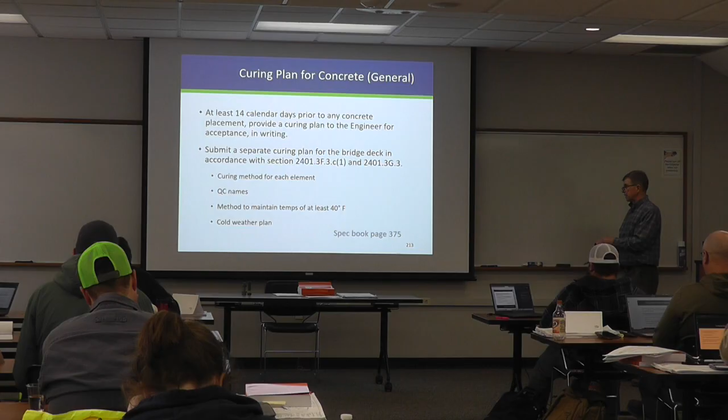So we looked again at some of this more for the placement, but here specifically for the curing. It says submit a separate curing plan for the bridge deck—this is on page 375 of the spec book. So what's the curing method to be used? How about the quality control names? Who's responsible for the contract? How are you going to keep temps at least 40 degrees? So if you've got cold weather concrete, make sure that's done, including the cold weather plan. But so all those things are part of the spec requirements on page 375, and that is under G.3, curing plan.

When I started in the metro region in my job as a construction engineer, we did that Lexington Avenue Bridge—somebody mentioned it before. It's 35E over the Mississippi River. I still remember going out to that project, and it looked almost like this. They were this far from the end, and they ran short on concrete. As they ran short of concrete, there was no cure. It looked exactly like this, 200 feet or whatever of cure. So I asked the inspector, are they going to have any cure? We went together and asked the workers, when are you going to put the wet cure on? And the literal answer was, can't you see I'm eating my lunch?

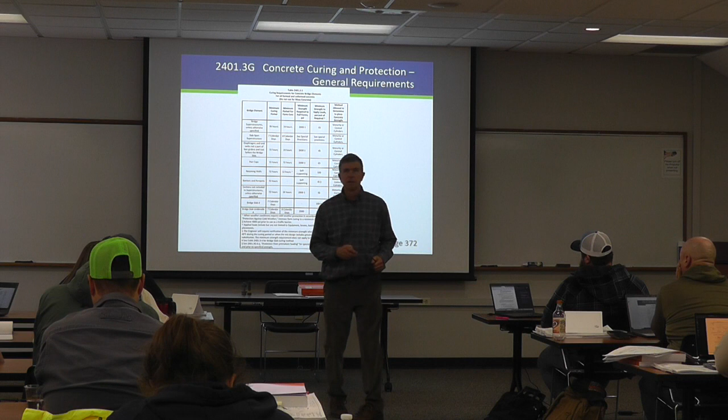So the important thing is, let's get it on. That's a good point. The specs, oftentimes they're that way - contractor reads it one way, we read it another way. But what we don't want to see is that you get the whole thing done and then you come with the cure.

Okay, so what about the general time for curing? General curing is in this table, 2401-3-2. Let's just look at that table, it's on page 372. We have looked at that before.

What is the required minimum curing period for a bridge slab? Minimum curing period for a bridge slab: 7 days, 7 calendar days. So that means keep the curing on for 7 calendar days. You see it down there, that's on page 372.

There's also some requirements for the bridge slab. We see that squiggly little thing, 2401.3G6E, down at the bottom, protection from premature loading for special loading. So always be looking, even though the cure is something, is there something else we need to discuss about the load?

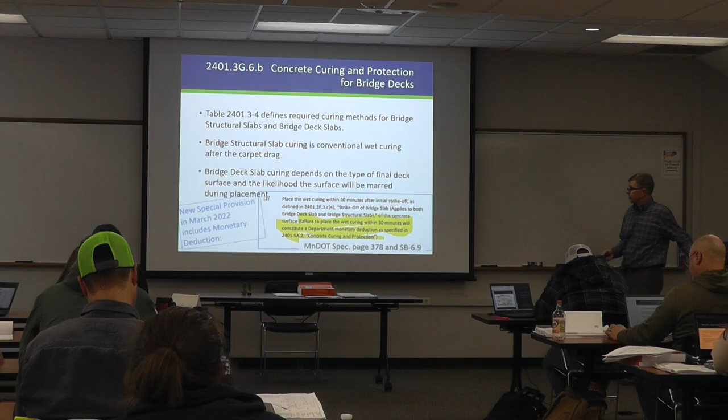And so that's giving some teeth to this part of the spec. Okay, so I mentioned this table.

Table 3-4. So depending on what we have, a bridge structural slab, that's the one that has an overlay. So the final surface has a low slump wearing course. Required curing method is conventional wet curing after the carpet drag.

What about if we have a bridge deck slab? That's a monolithic. Well, what do we have for wearing surface? Epoxy chip seal, texture, sidewalk. And so there are different things we have here of how they work.

So pay attention to that, pay attention to the sidewalk. So in these tables, for sidewalk, what type of curing method can we use? This is table 3-3, and then table 3-4. We've talked about that a little bit, but here are some options.

So no, a special surface finish isn't required. But you could use AMS, you could use this type 1D. You could use curing blanket, you could use wet curing. Formed is not applicable, and neither is SSF2. Just how do you use that chart?

For our bridge deck, which of these options is going to be applicable? For our bridge 27138, what kind of a deck do we have? With an overlay, and then which of these—bridge structural slab or bridge deck slab? Bridge structural slab, very good.

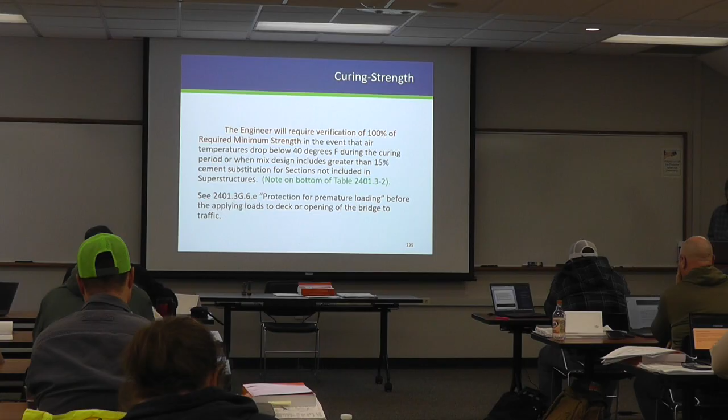So we do need to know when the required minimum strength has been met. And so how are you going to do that? We want to protect it against premature loading, but we're going to have to check either with our cylinders or with the other maturity methods to find this out.

So if control cylinders are used, make sure they're cast and covered. Place them not in some beautiful curing, but under the curing protection on the deck. It doesn't do us any good if we're curing the cylinders in a tank at 72 degrees and our deck is 45 degrees and struggling.

So just make sure that is done correctly. And check, we need 100%, but we also need to wet cure for that full duration. So don't let the contractor say, I've achieved strength, I can quit my curing after 4.5 days. No, it's still 7 days.

Cold weather protection is something that we need to be aware of. And so this is just talking about what we need, but we need to provide, down at the bottom here, maintain minimum concrete temps of 60 to 120 throughout the curing period.

So they have to provide a plan and show what kind of things they're going to do. If housing is used, we want to make sure it's vented. We don't want a buildup of carbon monoxide. So there's some spec language here, it's on page 380 of the spec book.

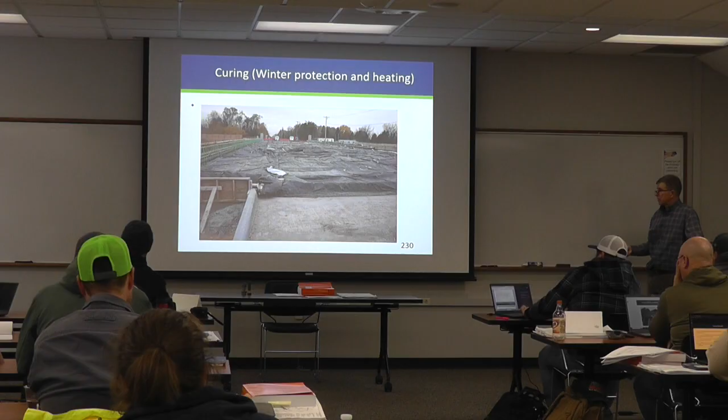On top, curing blankets with some movement ability for air to move through. They've got some sawhorses or something. We also like to see something wrapped up over bars so that all the heat doesn't escape out the side. So, yeah, where's the curing on the edge of the deck?

Our bridge deck cracking is oftentimes due to some of these drying shrinkage issues. It's the wet cure that gets put on in time. Maybe it's due to the mix. So we do endeavor to have low cement concrete, low water content, and larger aggregates. But then there's a chart that's included in the next page.

It's going to show what we have, and it's on page 378 of the spec book. This is in the spec book, and it tells you deck pours should only be permitted when the evaporation rate is less than 0.2 pounds per square foot per hour. And that's per the high performance special revision.

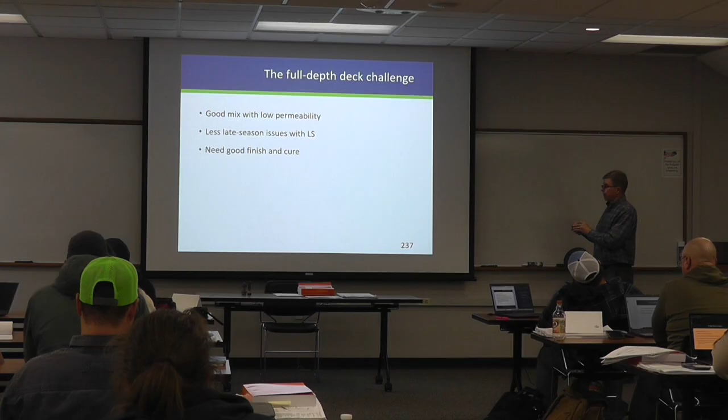So full depth - these are some additional things we can talk about. They're good mixes, low permeability. There's less late season issues because low slump has some cutoff dates. You don't have the same cutoff dates with our full depth high performance concretes. But we do need a good finish, and we absolutely need good cure.

So I think Jake's going to talk about that again. But when it turns out good, it can really be good. If it turns out bad and ugly, it can really be bad and ugly. So again, a lot of it's the placement, a lot of it's the cure. Just make sure that we are aware of what we're doing.

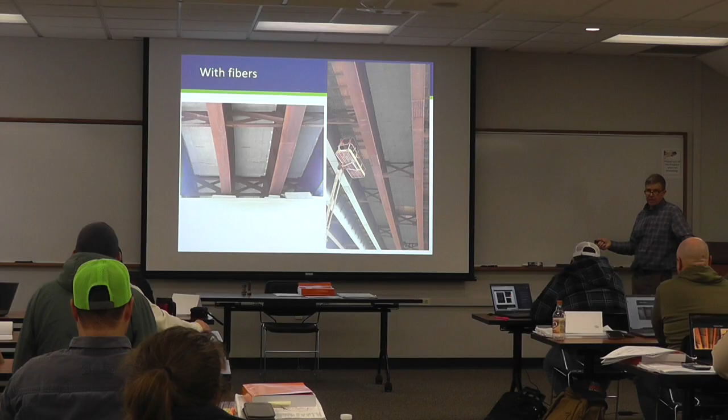Without fibers, we can get a lot of cracking like this. With fibers, it actually looks a lot better. So it's been a pretty positive experience using the fibers.

I think I'm going to keep going to finish. I'm running just a little bit beyond where I wanted to, but a few more slides. Let's keep going. Deck crack sealing.

There are requirements in the spec book now for sealing. The contractor is responsible for sealing cracks in the deck, and it refers to some things in 2433 in the spec book, including how to define low density or high density cracks.

For heavy loads and outriggers, we want to make sure we have our full capacity of concrete, our full strength. But also, if they have a high load they want to put on the deck, make sure an engineer has looked at and analyzed it. Spec 1513, page 45 of our spec book.